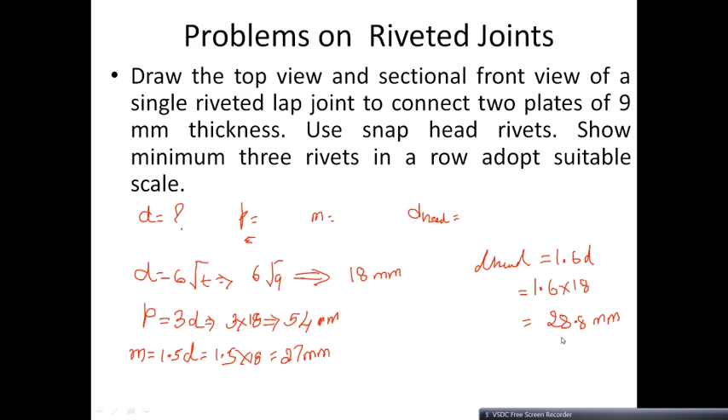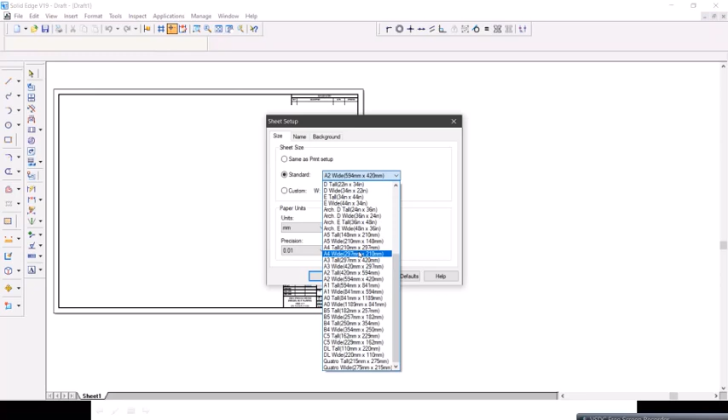So now we'll start in Solid Edge. We go for drawing. Right click on sheet setup, just remove this background. Now for size, select here instead of A4 wide, you go for A4 tall, because you need to specify a minimum 3 number of rivets. In landscape it is not possible. For border you just draw one rectangle. Okay. Now I'll start drawing.

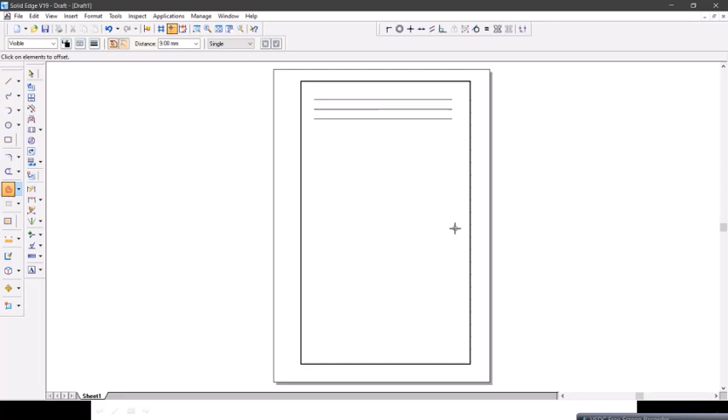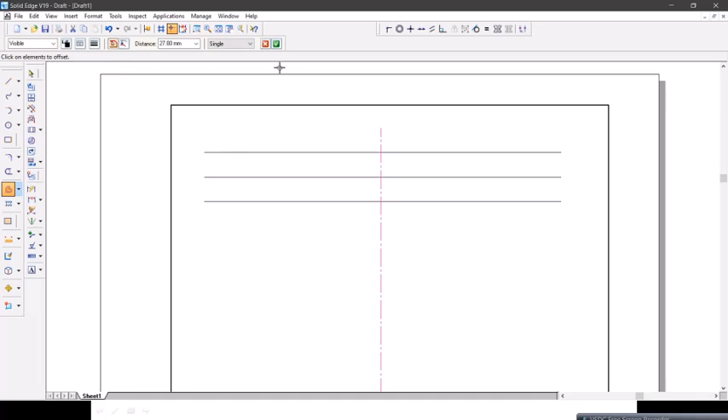I'll just draw one thin line here. Okay. I'll go for offset. Now plate thickness is 9 mm. Now I will select this line. I'll place it downside. I'll place it on upside. Now I'll draw one center line here. Draw one center line. As we calculated the margin distance, now I'll offset this center line to the margin distance. So margin distance is 27, that is about 1.5 d. Okay, left and right. Now trim here.

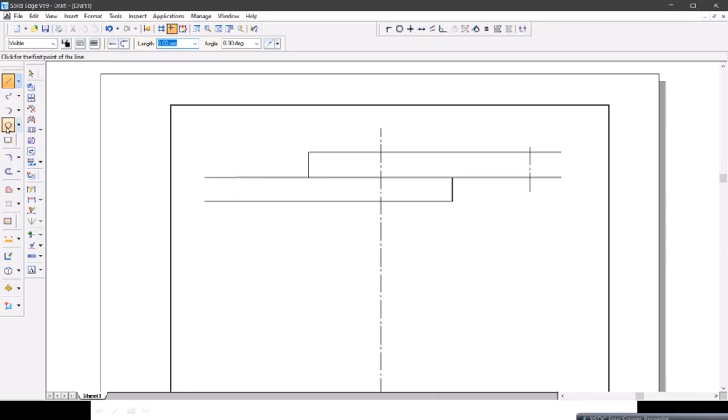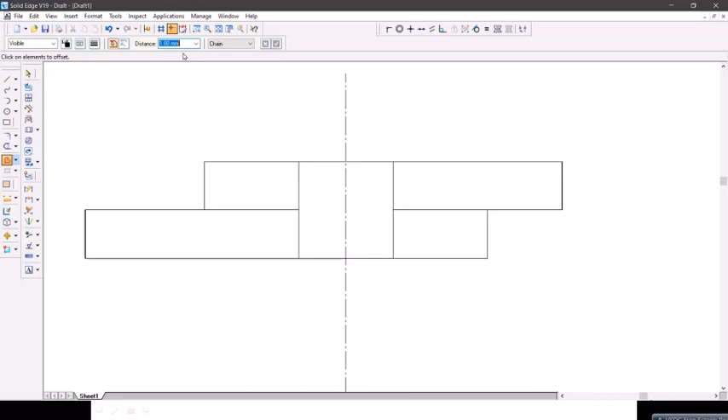Now for plate end on another side, you can just go for straight lines, or you can use the curve. Okay. Now this is the drawing of two plates. Drawing of two plates. Okay. I'll go for offset. I'll take distance as 0.1 into d, 1.8 mm. Select this line. I'll place it on downside. Select this line. I'll place it on upside. Okay.

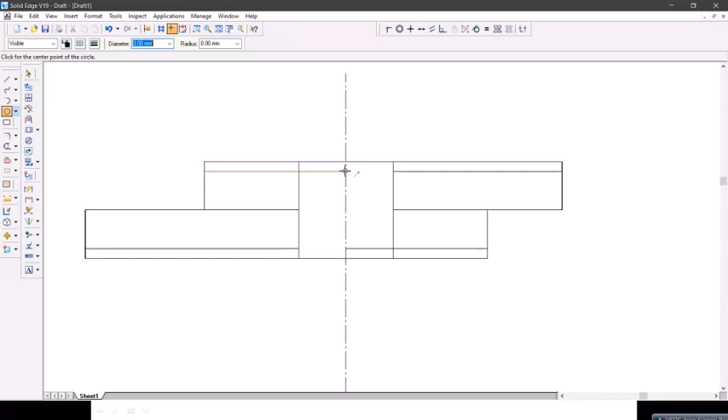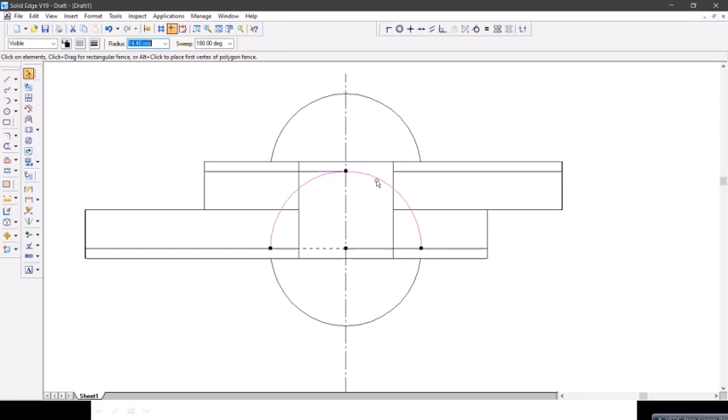Now what I'll do, I'll go for drawing a circle here by center point. I'll take this as my center point. Then diameter is 1.6 into 18. Now trim unwanted portion here. Now I need to show caulking edge. Take a line, draw a line from this end point, which has to be at an inclination of 80 degrees here. Now similarly, draw a line which has to be at an inclination of 80 degrees. Now trim unwanted portion.

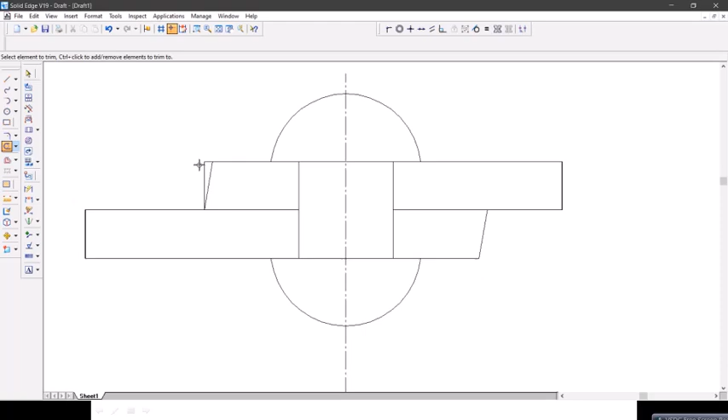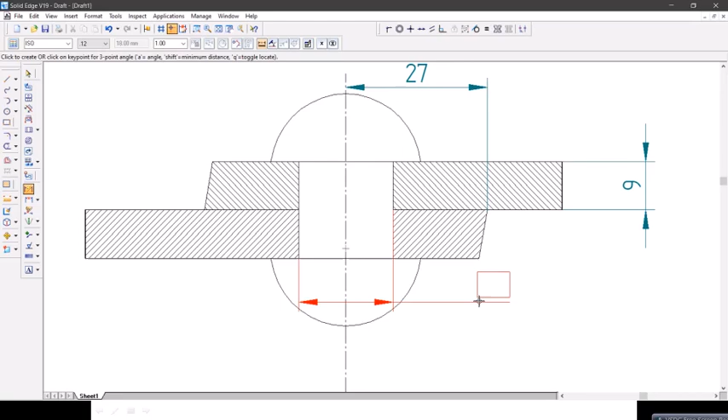Now use fill option to fill the plate 1 and plate 2. Okay. Now specify major dimensions. Now you text here. This is the sectional front view. Okay.

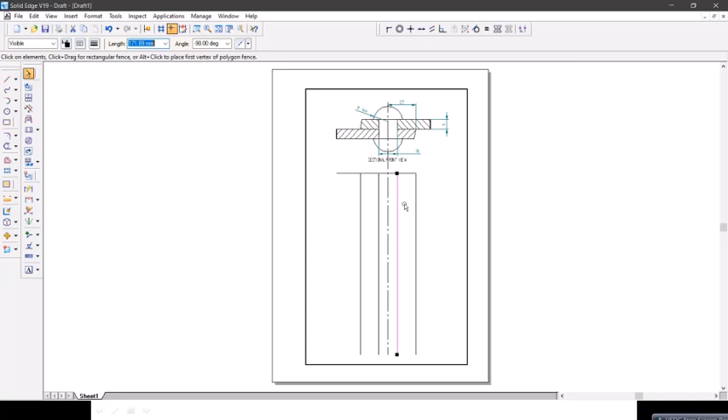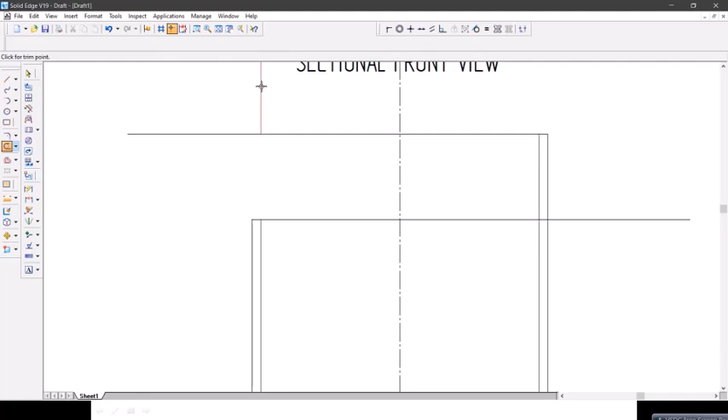So next we'll draw top view. Now for drawing top view, I'll just project the front view reference lines here. Okay. Now I'll draw one line. Now make this a center line. Okay. So next thing is that as you need to show minimum 3 number of rivets, I'll go for offset. Now the longitudinal pitch is 3d. Okay, 54. I'll select as single. I'll place here. Okay.

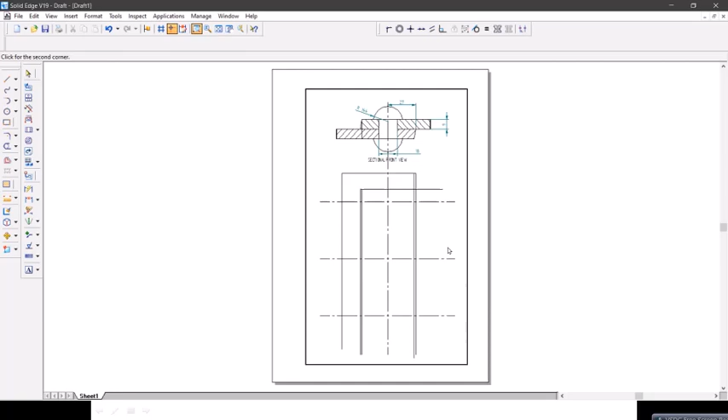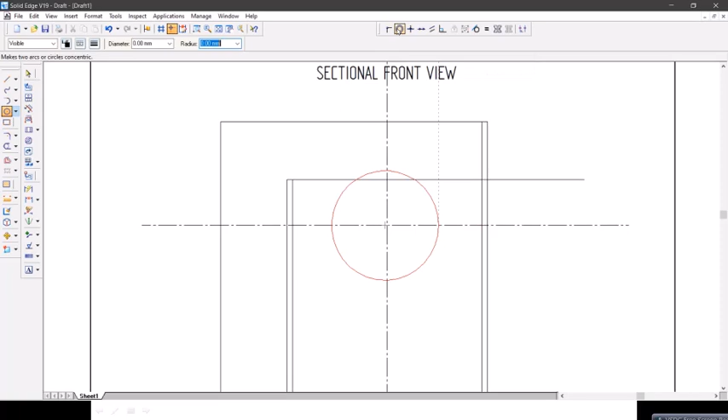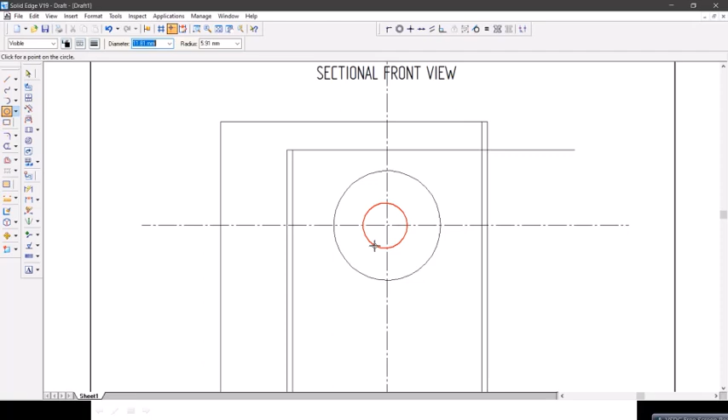Now draw two circles here. Okay. So one has to be 28.8. Okay. Another one has to be 18. Now make it concentric. Now this is hidden. Diameter of rivet is hidden. Make it a dashed one. Now trim this portion. I'll draw as a dashed line because it is exactly below.

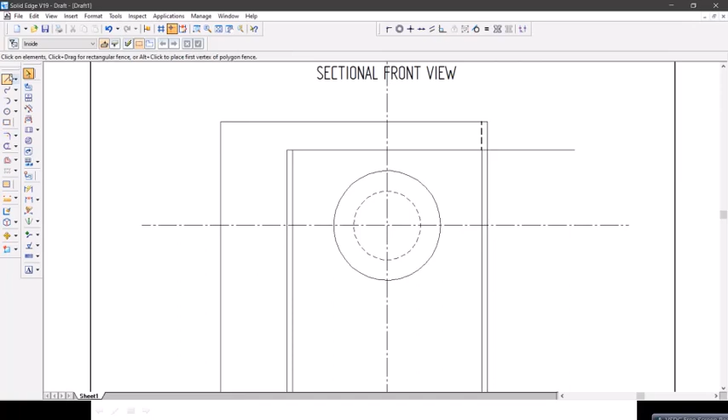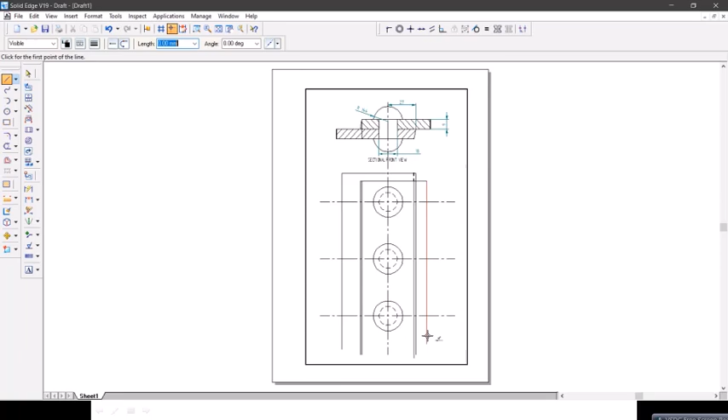Now we'll join. We'll just draw one line here. Okay. Now go for move with copy option. Now select these two circles. Take some reference points for copy purpose. Now I will select end point of this horizontal line and I'll place here. Okay.

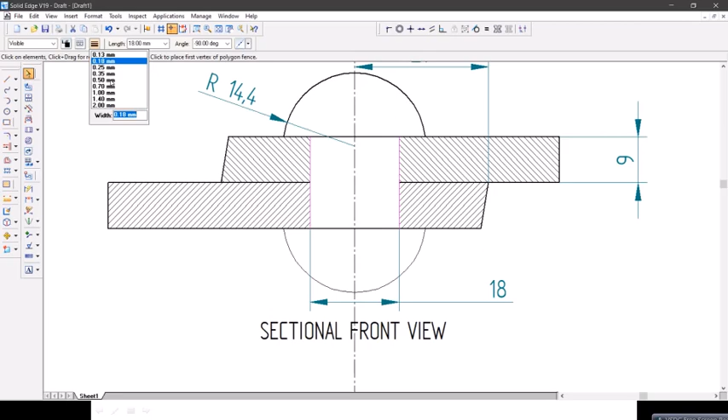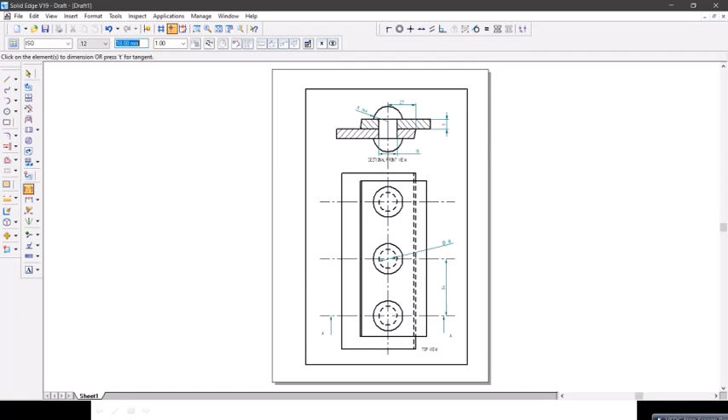So now with the help of leader line, we just place some sections here. So text here, it is the top view. Now provide dimensions. So here it is the longitudinal pitch, diameter of rivet. Okay. So now this completes the diagram.